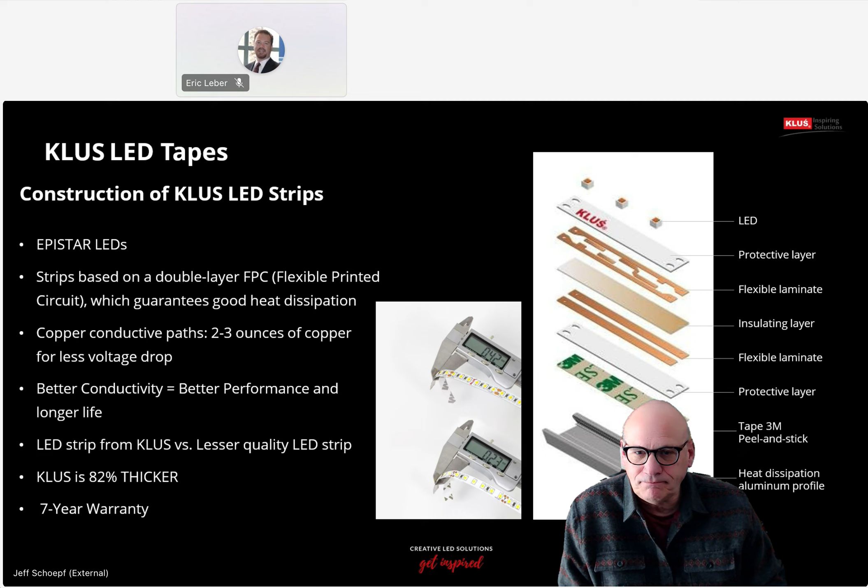So let's chat a little bit about the fun stuff—the products and capabilities. As mentioned, KLUS is known for its wide range of 120 aluminum profiles, giving the specification community a huge selection to choose from. Where KLUS is often overlooked is its variety of mounting configurations, its flexibility in modifications, and its ease and cost savings in installations that are also available. If you remember anything from today's discussion, it would be KLUS's commitment to providing exceptional lighting solutions to meet your project's needs.

With the limited time we have together, I've opted to focus not so much on all of our products, but rather review a couple of families, discussing the various options and flexibilities offered when selecting KLUS products.

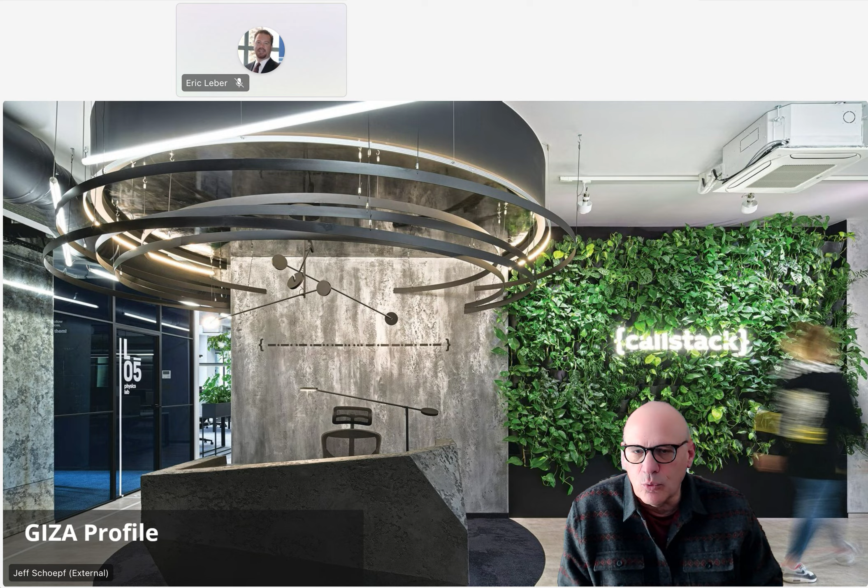The first product is the GIZA family, with an aperture of just a little over 1 inch. This family has 6 plus profiles, each capable of diverse performance and installation options. Each offers standard mounting solutions including surface and drywall, suspended, T-grid, semi-recessed, and recessed. For projects requiring something unique, we offer a commitment to collaborate with you to ensure we meet your design intent, whether simplistic or elaborate with an existing product, and when necessary, we excel at custom designs.

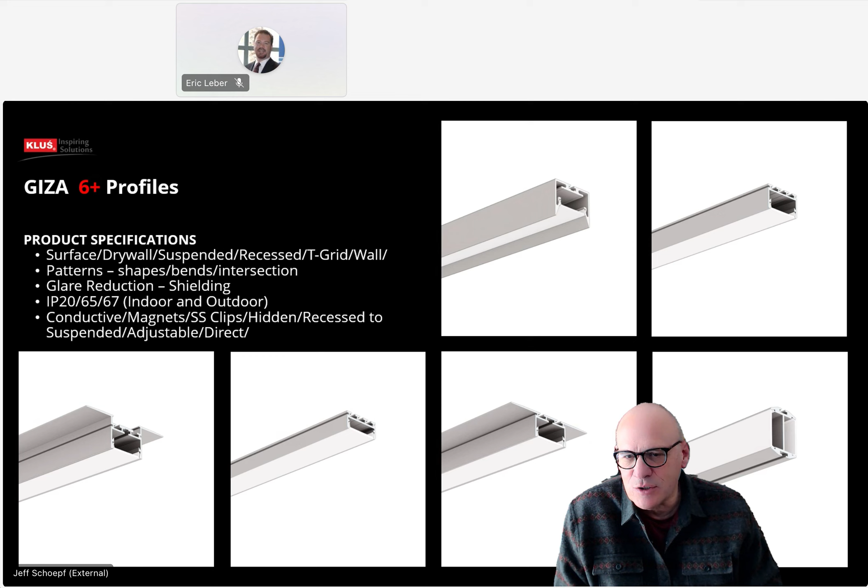All offer IP20, with a majority of our products offering an IP65 rating, and in some cases, for demanding environments, we also have an IP67 rating. We excel in our ability to provide mounting solutions, be it traditional applications like adjustable clips, conductive power feeds to eliminate that bulky power cord, magnetized fasteners, or specialized mounting tracks to assist the contractor when installation needs to be reduced labor and material cost focused.

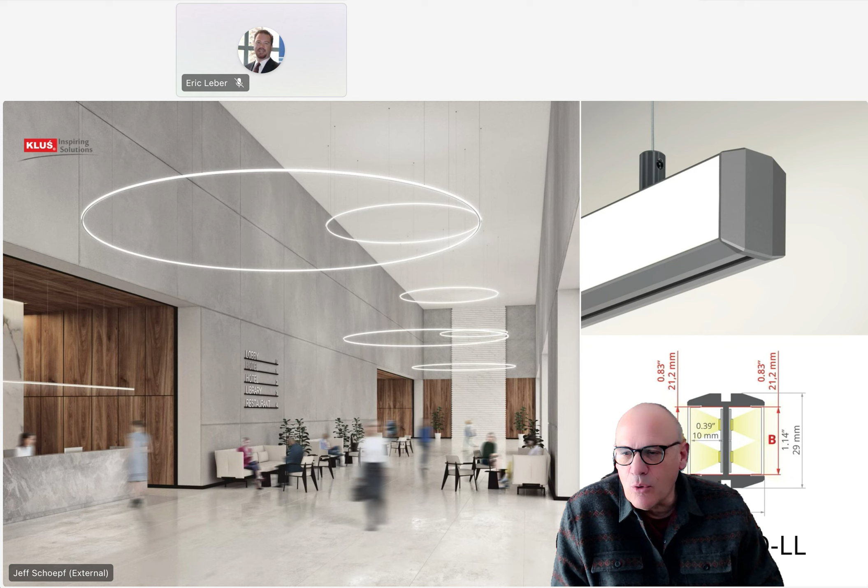Our first example is the GIZA-LL. In this example, you see multiple suspended rings—the largest, a 20-foot diameter with a conductive power feed and side-to-side distribution, providing 3,500 lumens per foot. Now, with the enhancement in technology, we are no longer limited to just a beautiful design, but we can also provide an exceptional source to meet required horizontal and vertical ambient light levels.

When I show this type of installation, I often hear that it's very beautiful, but that would be probably the first thing that would have to be cut from the project due to cost or complexity. On the contrary, this application is a fraction of traditional linear costs, not to mention contractor-friendly installation.

What you're looking at right now is a recessed ceiling to suspended direct distribution installation. The suspended housing profile has a low profile height without bulky power cords. Once again, we utilize conductive stems as our power feeds.

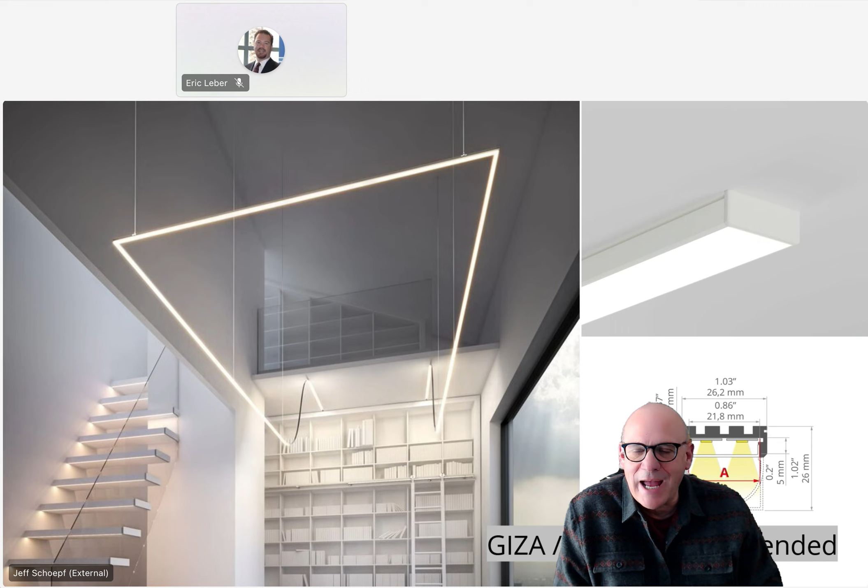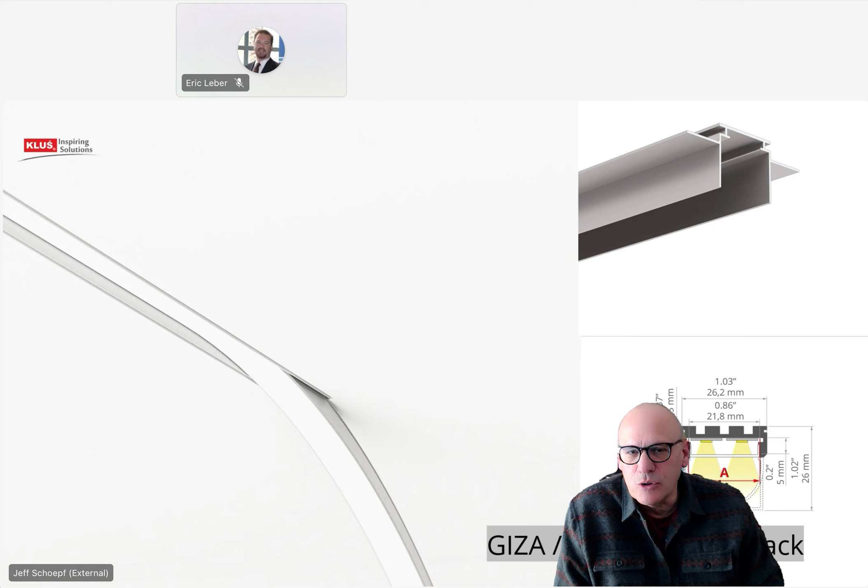The track installation is clean and without question contractor friendly, as the track is designed to receive the luminaire without tools, so the product is simply snapped in as an attachment.

At times, small apertures with a visible lens can cause an awful lot of glare. The Giza LL ZMG is designed with a recessed lens, shielding the lens from standard viewing angles.

This installation that we're looking at now is a suspended 10x14, direct beam distribution, conductive power feeds, two tapes in parallel generating 1800 lumens per foot.

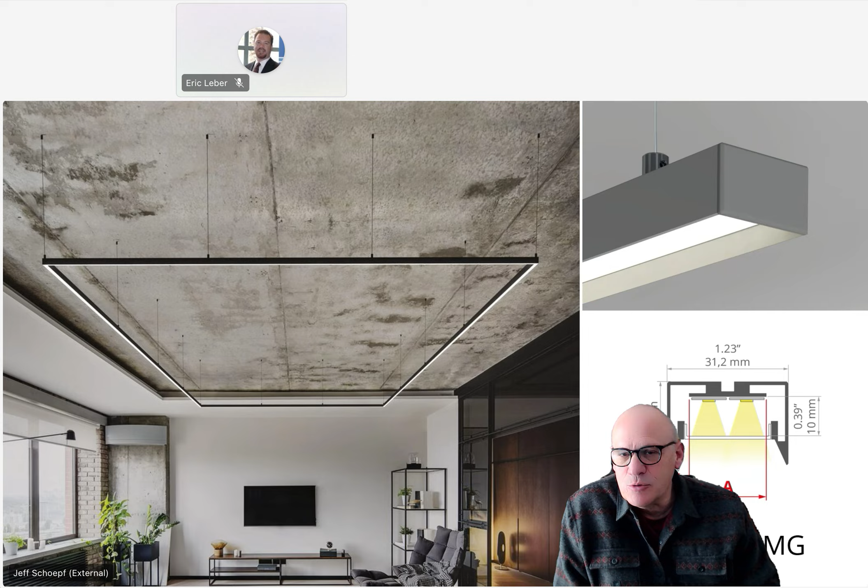The majority of KLUS profiles are capable of being bent in the vertical or horizontal axis, not to mention twisting the profile to create a fluid line of light.

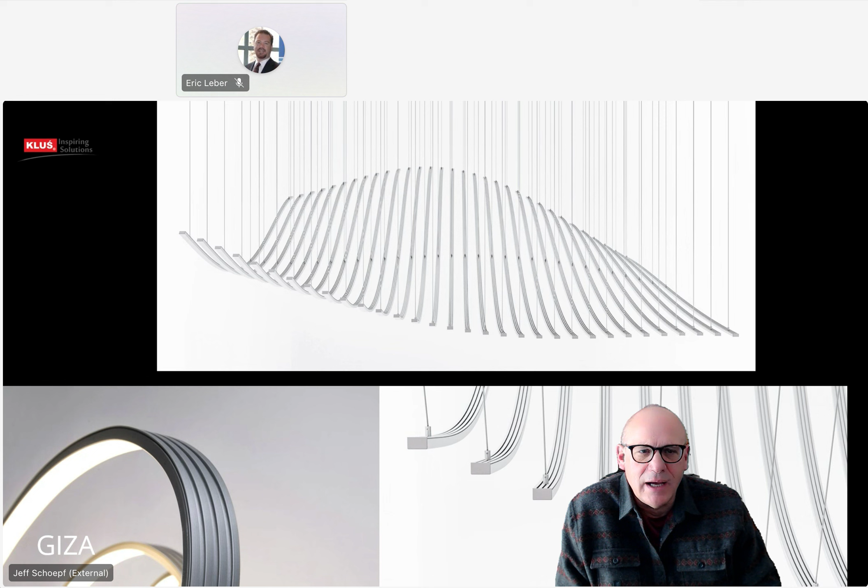One concept was realized with the low-profile Giza. This product required a fluid-like wave of light, which the Giza product was able to provide. This wave design is roughly a 10x20 pattern, direct distribution, painted white to disappear against the background and the brightness of the lens. Each run is a one-piece 10-foot section with adjustable conductive power feed.

The designer of this train station didn't want the traditional housing profile height of approximately 4 inches to distract from the overall clean lines of the project. So he opted to utilize the Giza family, the housing which has a 1-inch overall height.

The outer oval pattern distribution is up and down, with the indirect application provided with a single RGBW for the option of color accent. The direct distribution is static white with two parallel tapes at 1500 lumens per foot.

The inner pattern is surface mounted with a direct distribution. Again, the same static white to mimic that 1500 lumens per foot.

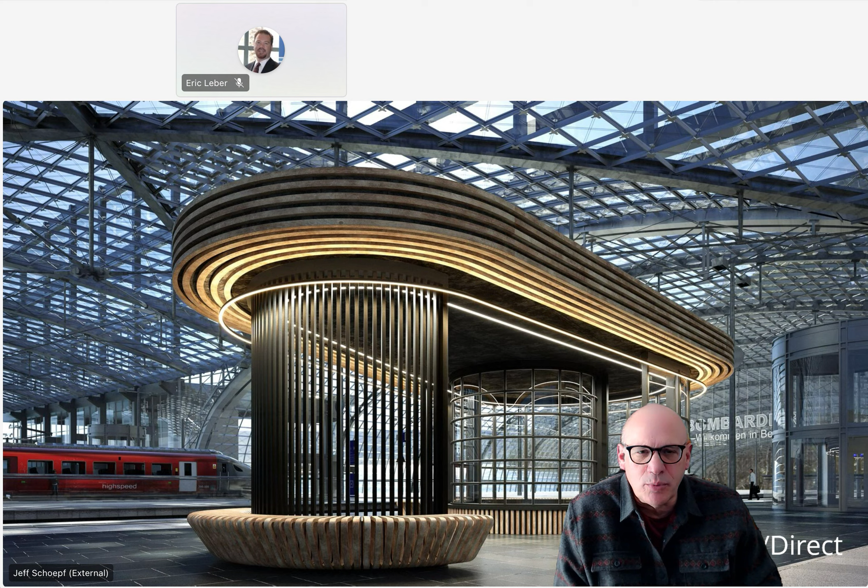The NISA family is the second example of product capabilities, each capable of diverse options and all utilizing that same common aperture width and overall performance. The NISA family offers surface, drywall, and wall mount options. Each offers a very continuous cove or perimeter lighting solution with excellent color and uniformity, perfect for restricted height access.

All are a fraction of the cost of traditional lighting coves, offering labor savings and materials.

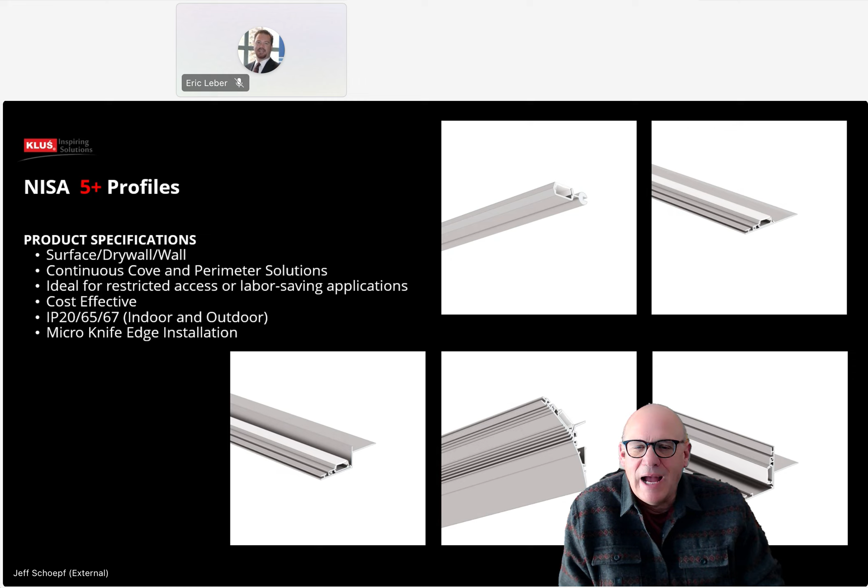IP65, IP20, and IP67 are available for all types, ideal for a knife edge installation, but at a very micro scale. So the NISA POLI - there are just times when beam adjustability is truly a must.

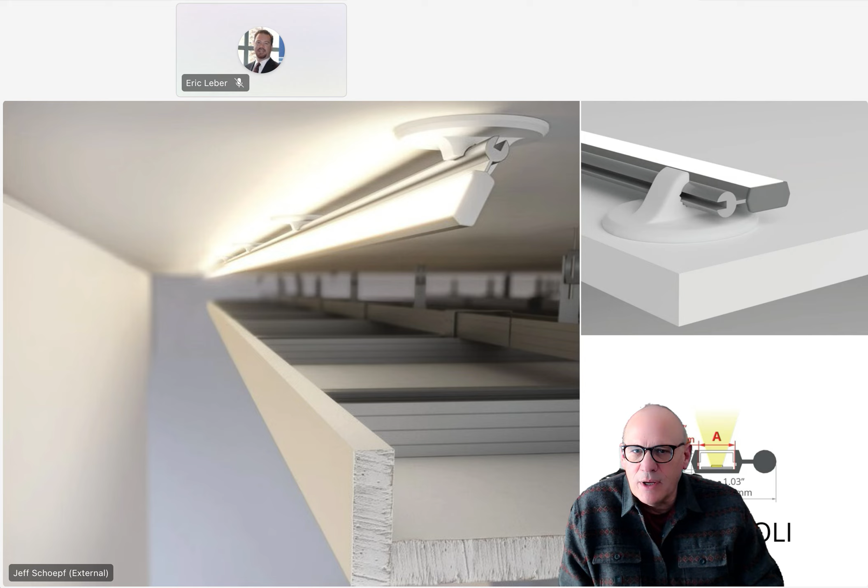The POLI offers a uniform continuous line of light, easy installation with 90-degree adjustability. The surface mounted clips can be installed horizontally or on a vertical surface, and they have a right or left 90-degree adjustability as well. The NISA PLA is perfect for those height-restricted mounting locations.

The mounting track can be secured from below, plastered and finished with paint. Each provides an easy to locate mounting track to ensure that the luminaire can be secured without line of sight.

The NISA NI is the perfect micro edge solution where the budget doesn't really allow for the cove material or even labor. The NISA NI provides a very clean edge, plastered and painted to provide a seamless transition to match the drywall. The light source can be mounted in vertical and/or horizontal applications for wall and ceiling illumination.

This design will become a project favorite as the illumination is uniform in both light level and color. It is budget friendly and without question cost saving because we are not building out a cove.

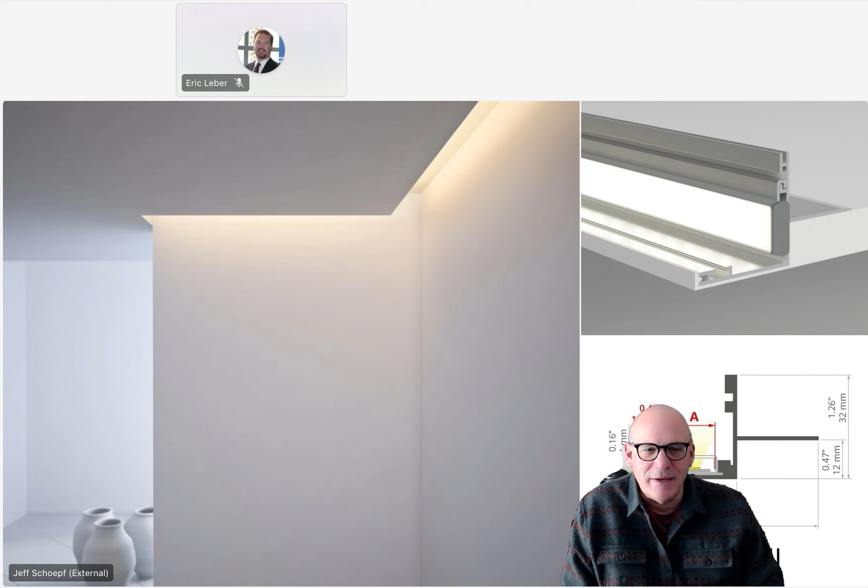The NISA Little - this is a 2-inch high by 1.5-inch offset wall mounted perimeter uplight solution, using the same light source as the other NISA designs. It is small in scale with the ability to plaster and paint the fascia for a seamless vertical transition. The light source is hidden but continues to ensure all corners provide a continuous line of light.

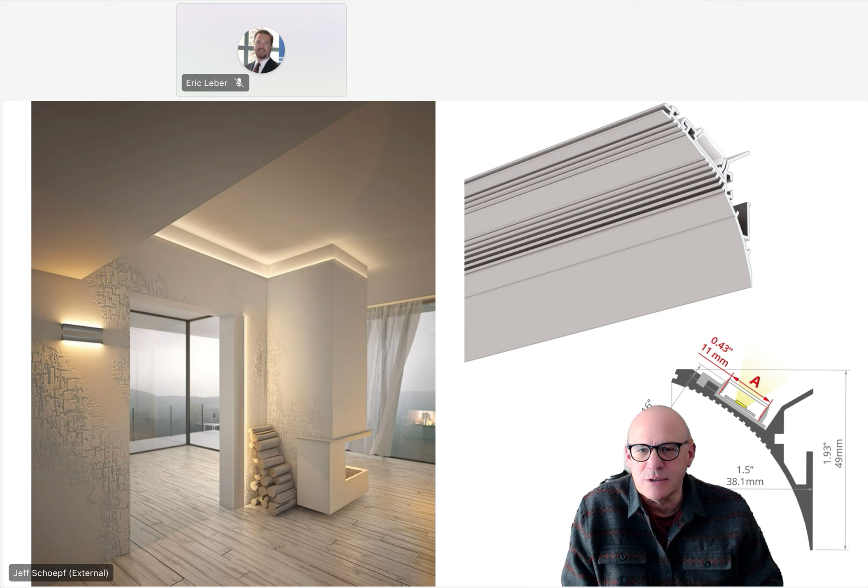For the next part of today's discussion, I would like to introduce two new products - products that likely would not be considered a tape profile solution by some, but an excellent representation of how KLUS sees its market position: to design exceptional application-specific lighting designs that just happen to utilize performance tapes and profiles, creating an exceptional lighting design at a smaller scale and reduced cost.

The OLIS K was introduced earlier this year - a 3.5-inch high extruded aluminum illuminated kick plate with a concealed LED source to graze the vertical surface and provide ample horizontal illumination. Available for recessed or surface mounting configurations, with finishes available in clear, black anodized, or optional painted surfaces if required.

The OLIS K was designed to provide a continuous, robust, yet elegant illuminated kick plate. The corners are color matching with inside and outside corners, right and left end cap options. This product is ideal for wayfinding or egress lighting where codes permit, with optional IP65 for outdoor applications, and is easily assembled and maintained.

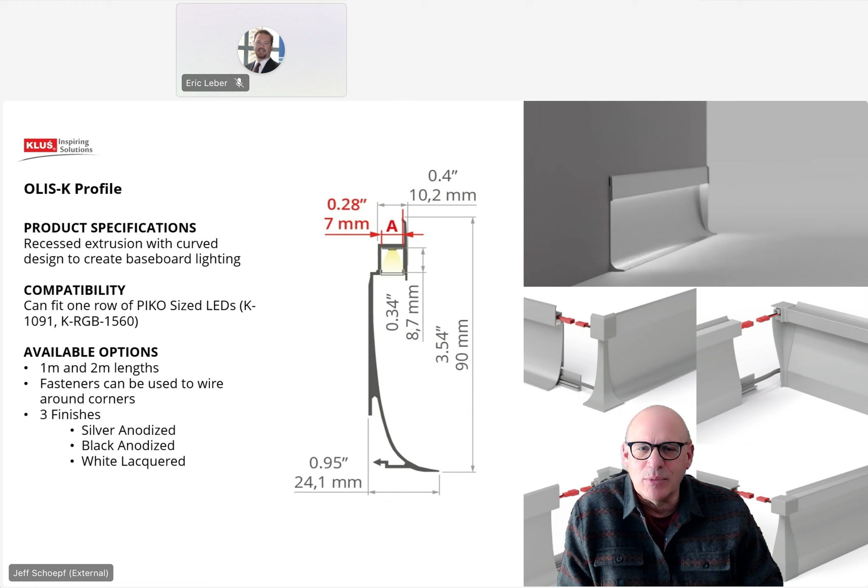And finally, I would like to introduce the Plank & Duo, a very low profile surface mounted sconce - an indirect, direct, continuous lighting solution, ADA compliant with less than 1.5 inches offset from the mounting surface. Overall height is under 4.5 inches. This light source is angled to ensure a uniform gradient indirect and direct wash of light.

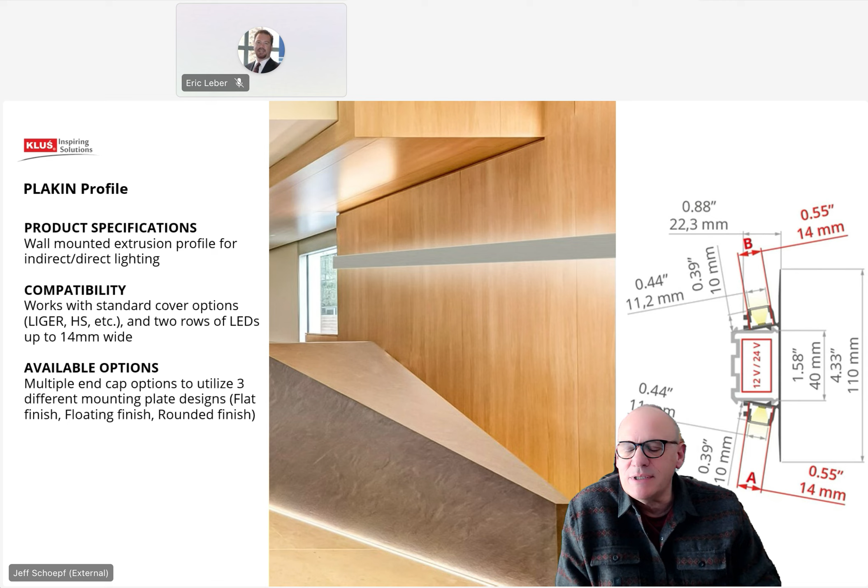Various coatings can be applied to the surface of the extrusion fascia - it can be anodized, veneer, plaster, or even painted. Bullnose or straight edge corners are available to terminate runs or even provide a continuous run around a 90-degree corner. The PLAKIN Duo can be mounted in a horizontal or vertical position, and like most of our products, is optional for IP65 or outdoor applications.